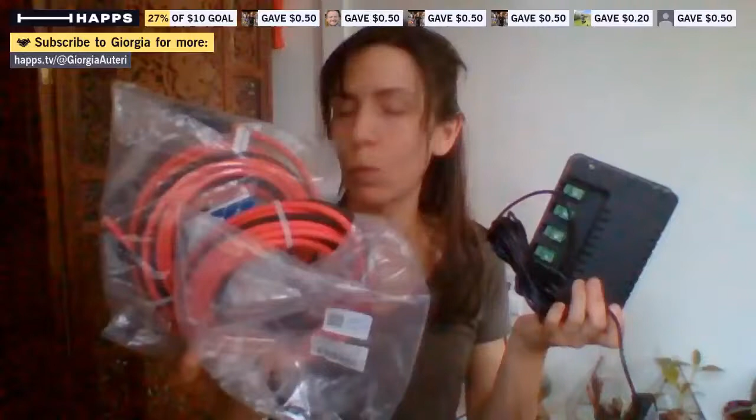So I'm just kind of sitting here. It's the morning, it's breakfast time for me, I have my tea here, and I'm kind of planning out my day. Like, what am I doing with these wires? I'm sitting here with a whole box of wires and the solar stuff, reviewing my notes on how to set this up. That's not very many notes. There's more on previous pages. But yeah, wish me luck.

Hi Frankman, I haven't seen you in a while. Thanks for stopping by.

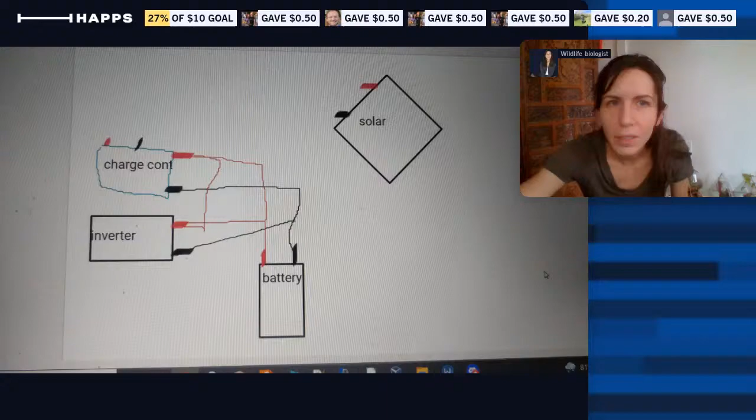I also have these lovely diagrams of how to set up the solar that my brother has shared with me, which you can see are very illustrative. Here's another one. So yeah, that's kind of what I'm going off of here. Oops, not that one. Happs likes to change things around a lot on me.

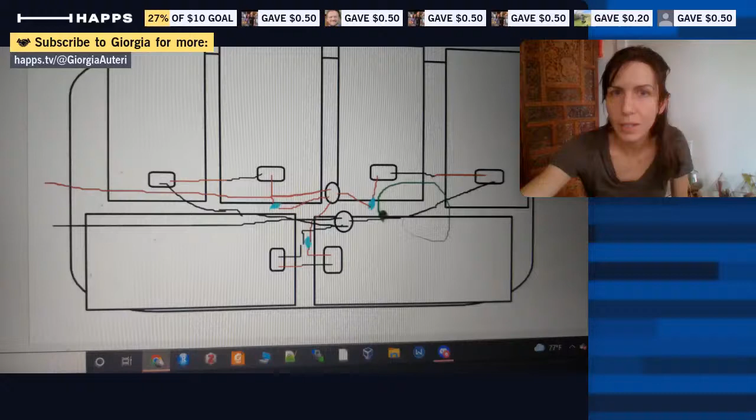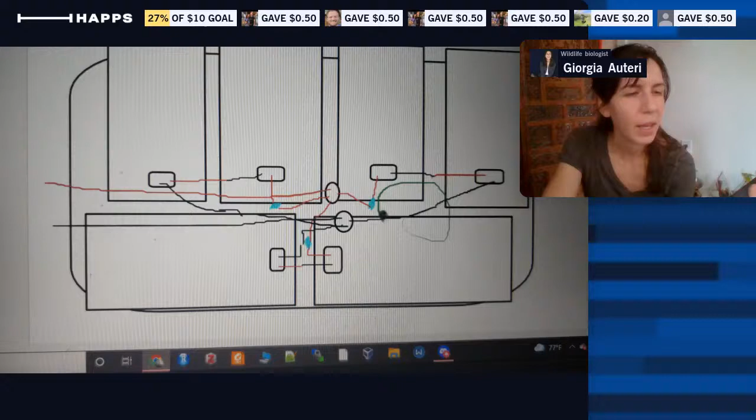Setting up this solar is part of a move that I've recently done, and also as part of the move I have a different internet, which I'm still kind of learning about its quirks. I'm off grid now in my current living situation, so I've been using this internet hotspot for my internet, and sometimes it works really well, and sometimes it doesn't. It's an Alcatel Link Zone 2 that I got through the Calyx internet project. So it seems to be working well right now, though.

So that is great, I'm excited to see that.

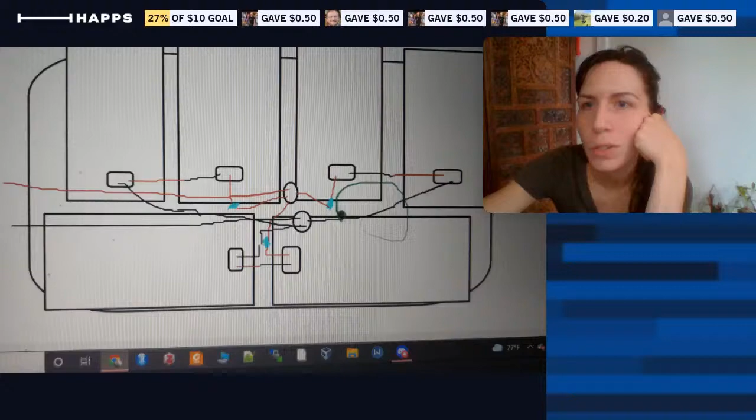So now I'm setting it up. I'm adding the solar panels into the system so that the batteries will be getting charged by the sun instead of just an on-the-grid system.

So it looks like I have 2 of these really long wires, and they have a similar style connector to what we just saw at the ends. It's really weird that the video quality is so bad—I'm going to turn my video off and on again because it says my connection is good. Still fuzzy.

Frankman asks, how long does a full battery last? Well, it's pretty variable. I've cut my running time down quite a bit. I have 4 batteries, and I hook them up 2 at a time. I could have hooked up all 4 at once, but I intentionally wanted a built-in warning at the midway point—like, okay, you've used up half the electricity you have allotted, and you have the next half of that time to get your solar panels set up. I wanted a warning that I'd used up half my electricity, and that warning came after about the first day and a half of using those first 2 batteries. I got a warning: batteries are too low, no more power.

So then I hooked up the second pair of batteries. That second pair has now lasted—I think this is the 5th day now—so I got a lot more savvy about my energy use. And I will say it wasn't like I was just using electricity willy-nilly the first 2 days. I thought I was being pretty cautious.

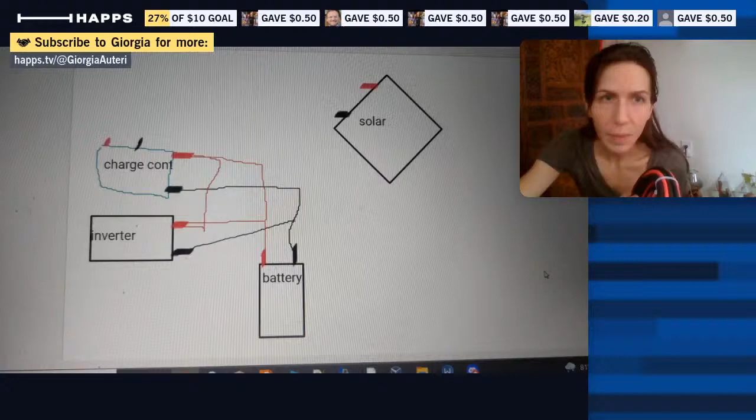Looking at this first diagram again that my wonderful brother sketched for me, there's that one big box that says solar on it, which just represents the roof with all the solar panels on it. Then there's the other three boxes in the lower left-hand corner that say charge controller, inverter, battery. That's all stuff happening in the shed with the battery stored in it that I showed you.

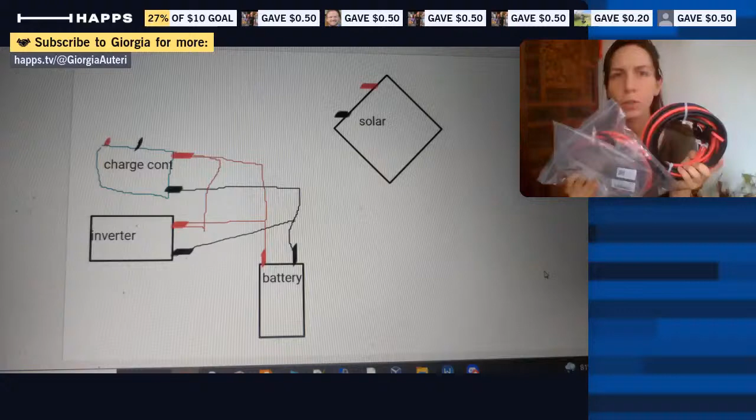I know that at least one of these long sets of wires is going to go from the roof to the shed. We might have to hook one of them up just for extension purposes, so we can connect two of these together if it needs to be longer to get from the roof to the shed. That's kind of what we're seeing in that picture.

Then I have to hook up the charge controller. The inverter and the batteries are already set up and functioning. There's actually some shorter cables I already have back there for setting up the charge controller. So most of the work today will be happening on the roof.

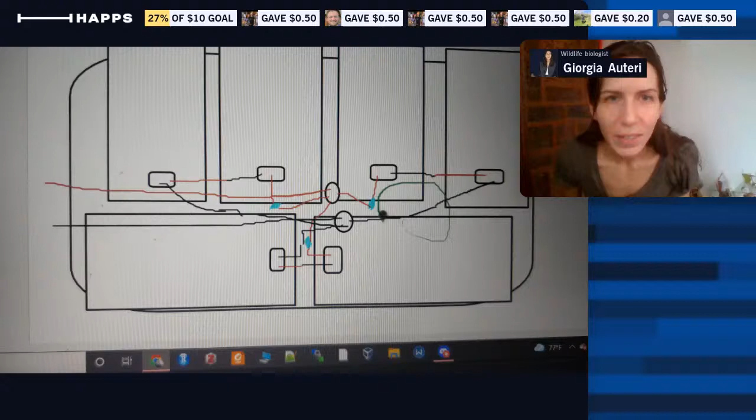We can zoom into our little roof sketch, the next picture that my brother did. The goal for today is to set up 6 solar panels. You can see the sketch of how they're presumably going to fit on my roof. He has a lot of little diagrams and stuff like that. The big rectangles are the solar panels, and they get hooked up in parallel.

Looking at some of my other cords that I have over here, I feel like there should be more cords - I should have looked at them sooner. But so there's six solar panels, and we're hooking them up so that there's 3 pairs hooked up in parallel, and then those parallel sets are hooked up in series. That might mean something to you if you've taken physics recently, or if you're just knowledgeable about physics.

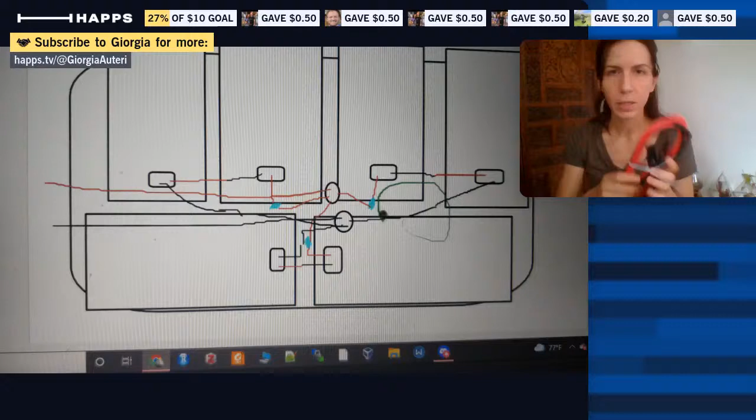So these shorter cords we're going to be using to hook up the solar panels to each other, like the pairs of them.

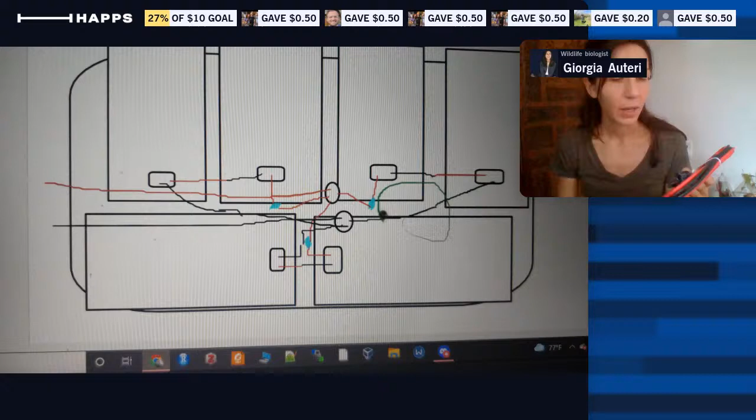From what I understand, I haven't seen the solar panels yet because I'm going in about half an hour to pick them up from the store where they arrived. I don't have a car, so my friend is giving me a ride - gotta go walk over there right after I finish this and get a ride to get my solar panels.

But from what I understand, they have places in them where you can plug into them. So these cords I have are gonna get plugged into the solar panels.

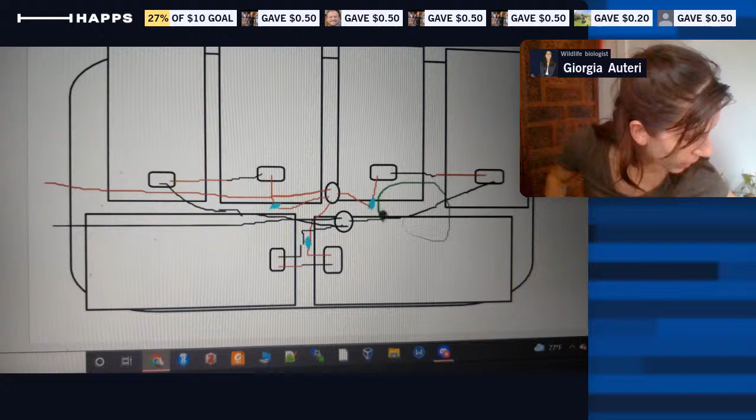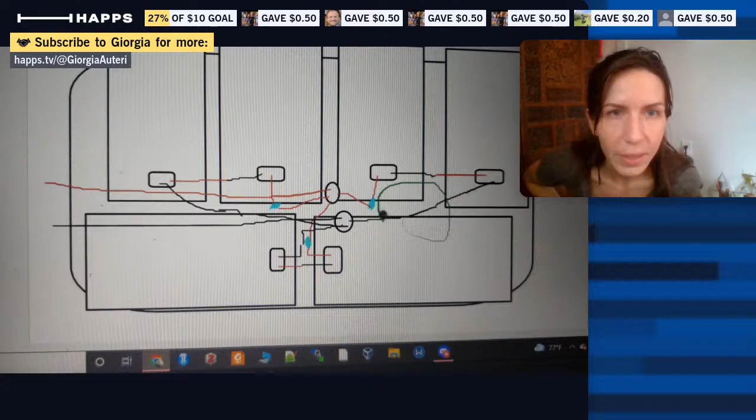You can see in that diagram we have some other things going on. There's the panels, there's red and black wires which I just showed you some of, and there's also little circles and little blue dots on the diagram. I'm trying to remember what is what - I believe the blue things are fuses, and the circles are Y connectors or splitters.

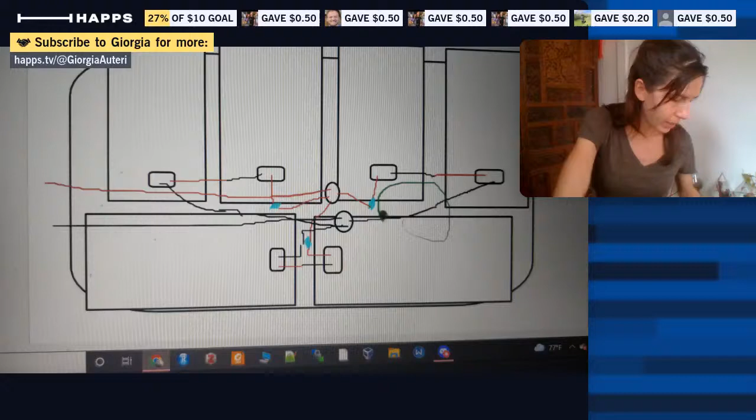So the splitters are these. I know that because the bag I ripped them out of says 'solar Y branch connector' on it, so I was like, oh, uh-huh. And it's kind of like, if you look at them, what else could they possibly be? So I'm going to open it up so we can both see. This is more fun for me to do with you than by myself.

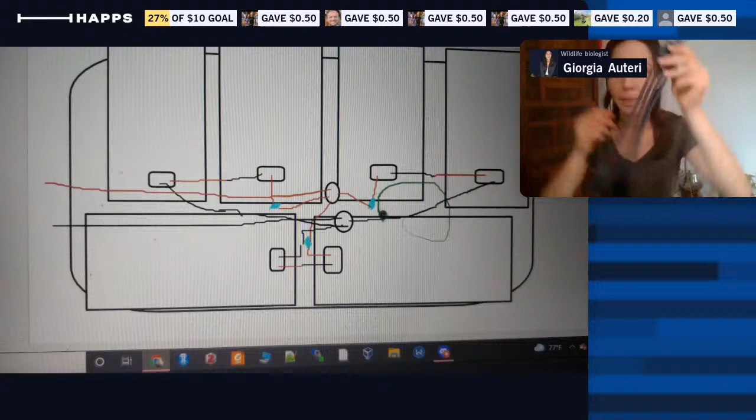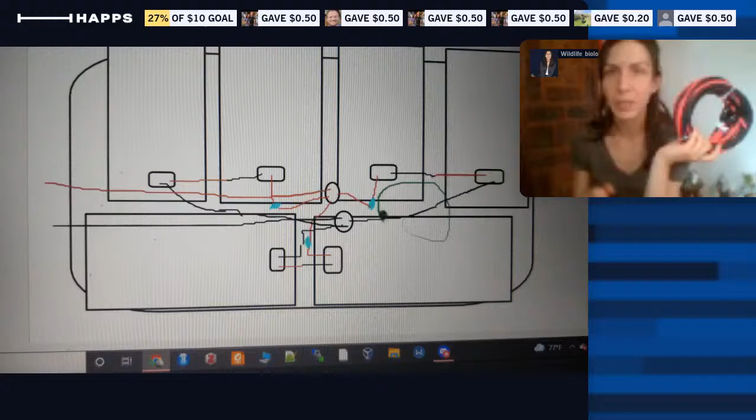So it looks like this is a way of taking many cords and reducing it down to a cord, right? Because ultimately we have these cords going around, looking at all these different cord groups - we've got to get them down to just 2 cords, because that's what's getting piped into the shed to the charge controller. So that's what this thing does basically.

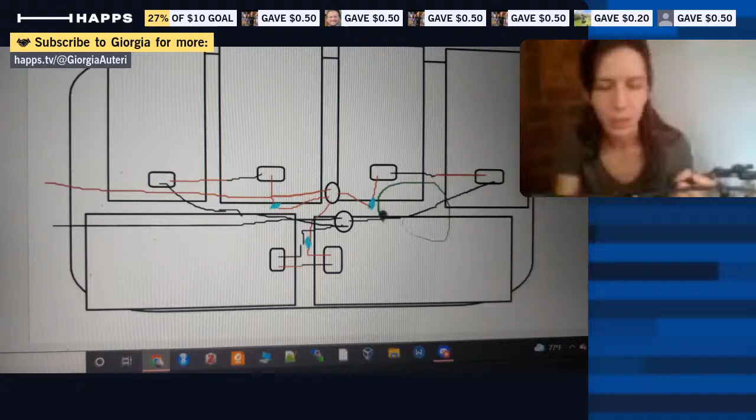I'm not quite sure how that works. There's like 4 things down here and 1 here, and I don't know how much the direction matters. It looks like it has a couple holes where you can attach it to the roof, or something like that. But it's something I'll have to phone a friend about, figure out what's going on with these a bit more before I actually get started.

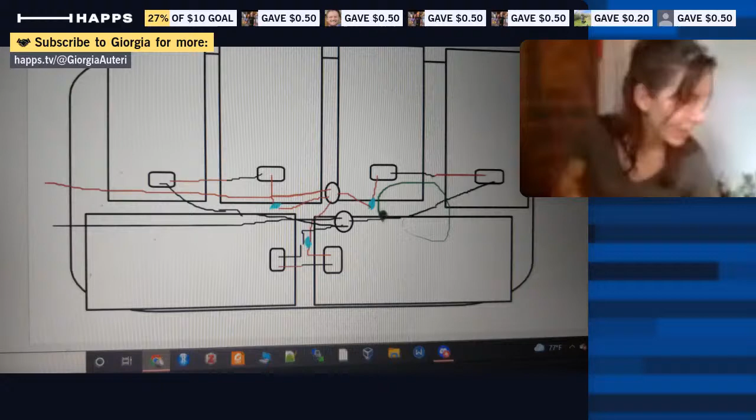So there's one of those, there's another one of those. Put those aside. It's kind of like an unboxing video - come look at all my crap. Bunch of wires. Oh, it's just another medium length cord.

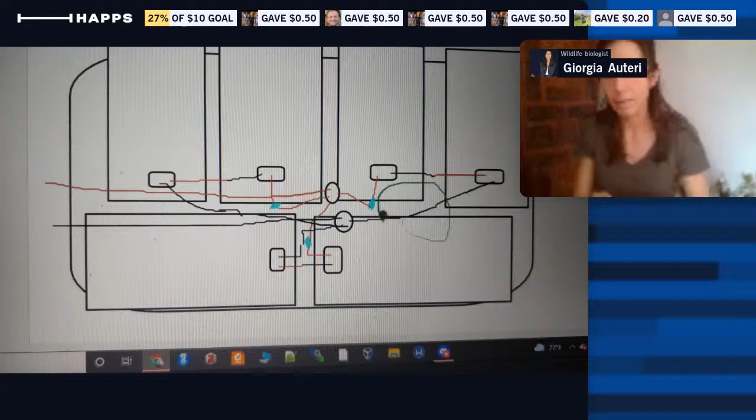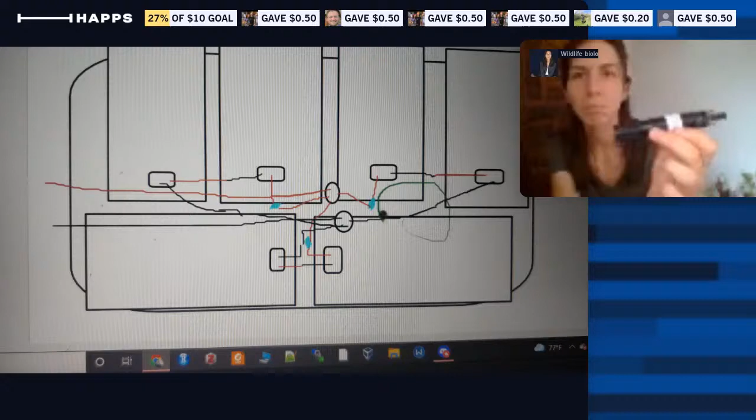So the fuses I mentioned, these are the little blue things in the diagram. I haven't looked at them very closely yet. It's Slocable, solar PV fuse, 10 amp. There's a slot at each end for one thing to plug into, and a matching plug end over here. It sucks that the video is kind of blurry, but those go in between the cords at some sections. So we've got those 2.

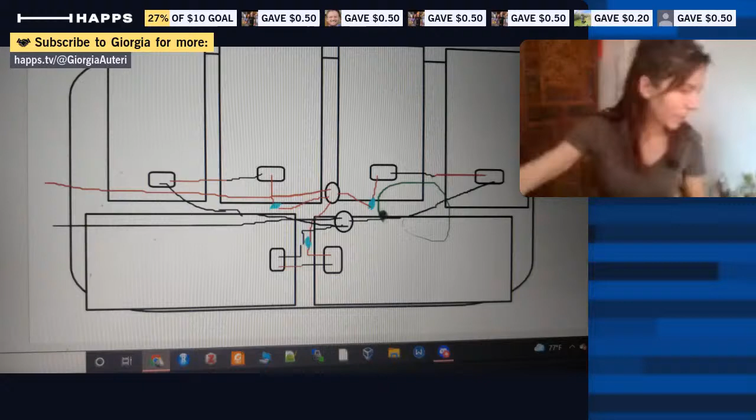All right, well, that about wraps it up. I have some other cables and stuff like that out in the shed with the batteries. But having gone through and looked at everything, I feel a bit more prepared to go out and hook up these solar panels in a few minutes.

So I don't know what to say, like wish me luck, I guess. I hope that I don't kill myself or explode my house.

It's definitely one of those things where I'm a lot more comfortable calculating my energy needs and seeing how much square footage of solar panels I need and what appliances to get. But now that it's down to nuts and bolts of putting stuff together, I'm like, oh my gosh, I'm gonna screw something up. I don't really know what I'm doing. Even just drilling the holes in my roof to attach the solar panels, I don't want to create a hole where I'll get water leakage.

Yeah, thank you, Frankman, thanks. I appreciate the good luck.

Oh, and my image is suddenly clear, although I'm a little bit frozen. But that reminds me of one more thing I have to show you, which is the mounting equipment for the solar panels. I'll be right back.